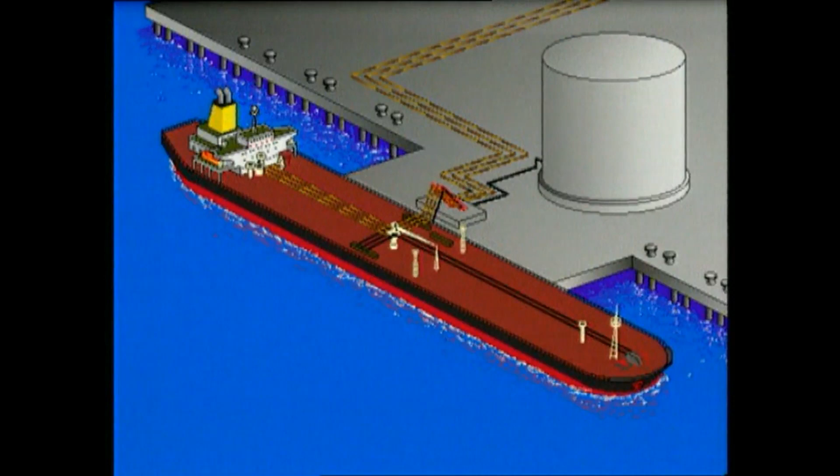The vessel has reached port and is ready to discharge her cargo of crude oil. To discharge the cargo, the vessel has 3 centrifugal cargo pumps. The pumps are located at the bottom of the pump room. The pump room is situated between the engine room and the cargo tanks. Let's take a closer look at the pump room and how to run the pumps.

We will not be looking at the order of cargo discharge, nor will we look at the operation of the crude oil washing system. However, both these are important aspects of cargo discharge.

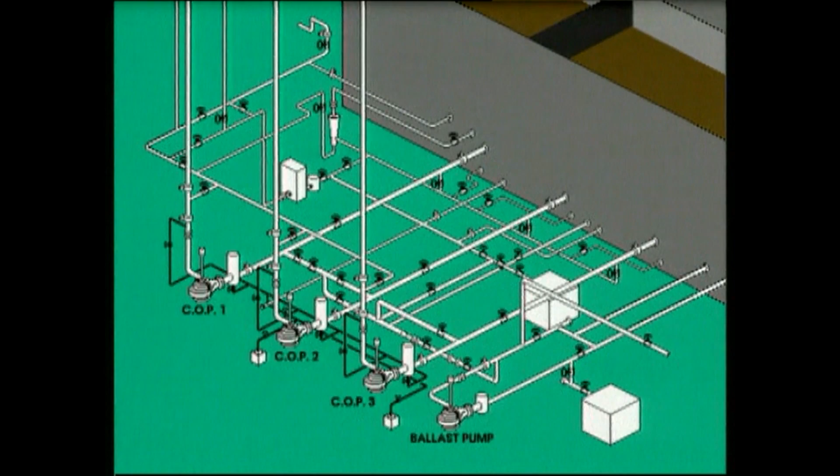Each cargo pump has a capacity of 4,000 cubic meters an hour. In front of the pump is a mud box with a strainer to protect the pump from solids. There is a riser to the deck line with a non-return valve and a discharge valve.

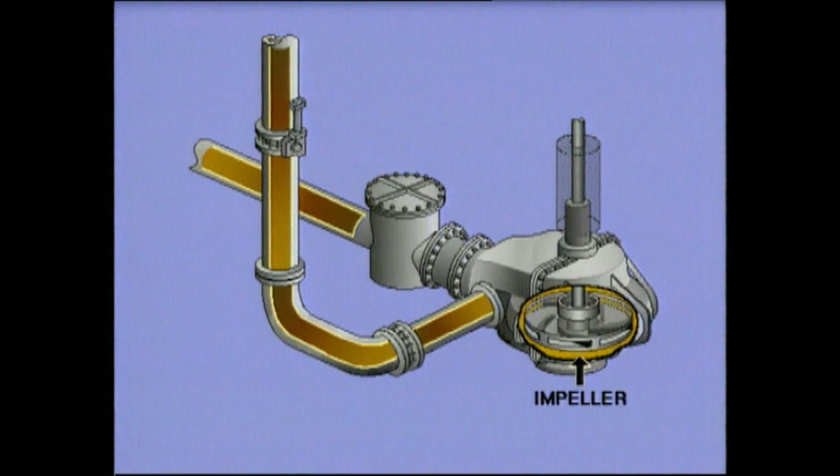In slow motion, this is what happens. When the pump is running, the so-called impeller is driven at high speed, showering liquid through the pump. The liquid is entering the rotating impeller through the eye in the middle. The impeller vanes force the liquid to the periphery of the pump. Velocity is converted to pressure in the casing of the pump.

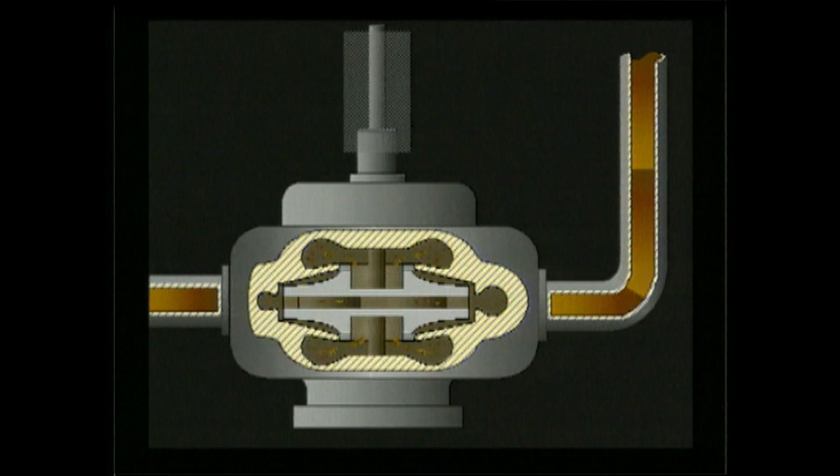Let's start with an empty shore tank, an empty line, and a ship's tank filled with 20 meters of fresh water. Let's imagine the pump as a closed valve. Note the different heights marked. In this example, fresh water is shown to simplify the calculations, and we'll be using the metric system.

There are manometers at the suction side and the pressure side of the pump. There is also a manometer where the vessel is connected to the shore at the ship's manifold.

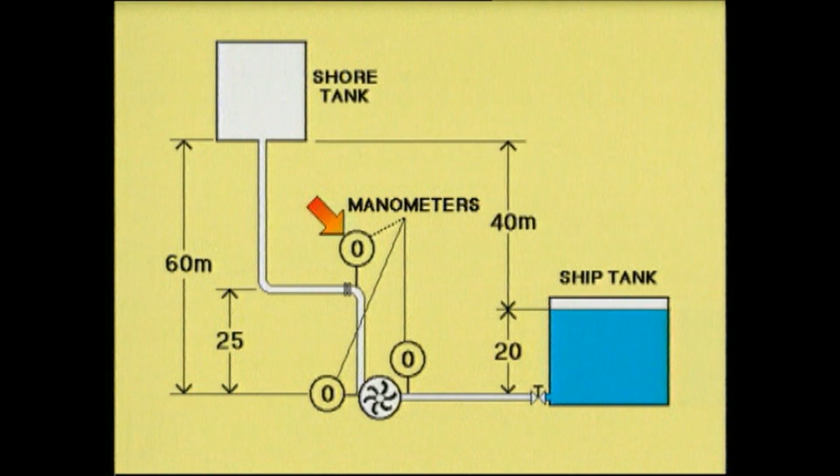We're now filling the lines with water. The manometer at the suction side reads 2 kilograms per square centimetre, at the pressure side 6 kilograms per square centimetre, and the manifold manometer 3.5 kilograms per square centimetre.

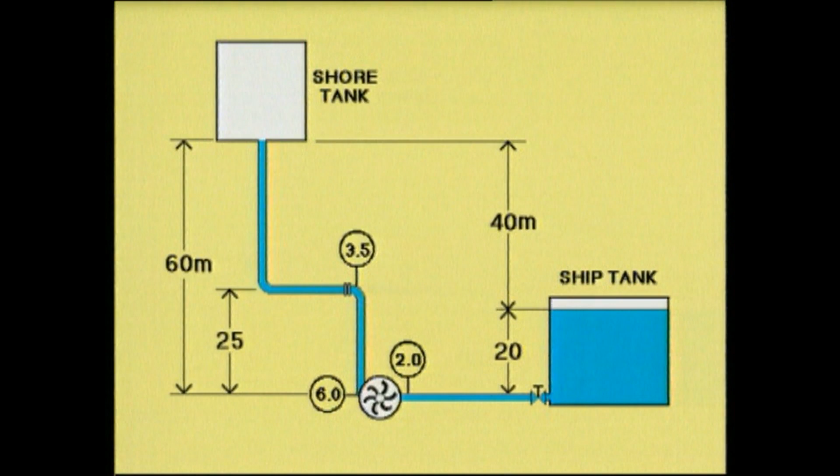The situation looks like this. There is one column of liquid, 20 meters high, standing on the suction side, called the suction head, and another column, 60 meters high, standing on the pressure side of the pump, called the discharge head. The difference, 40 meters, is the total head. To pump water to the shore tank, the pump must create a head bigger than 40 meters.

An additional 3 meters of water is filled into the shore tank. You should note that the pressure at the pressure side of the pump rises by 0.3 kilograms per square centimetre. The pressure has nothing to do with the volume of the pipe or the tank. Only the difference in height counts.

There is no change of the suction head. Total head is now 43 meters. This is the static situation.

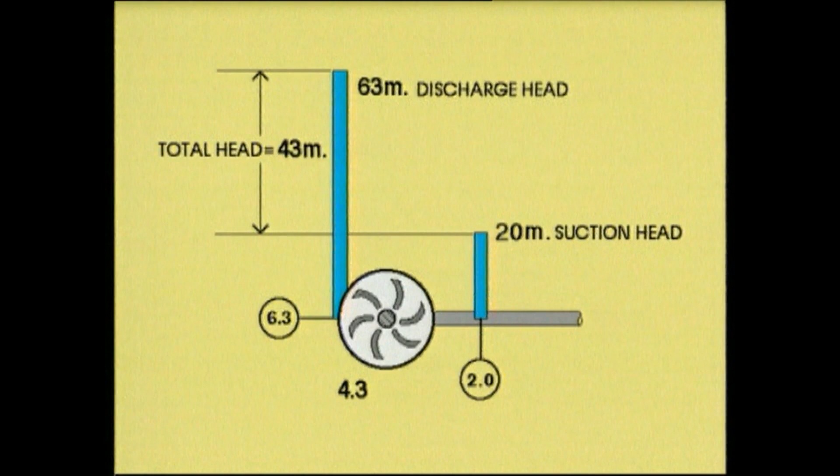Now let's run the pump. We will use this symbol for the energy added to the system by the pump. The smaller symbols show the resistance in pipes and valves. This is the dynamic situation.

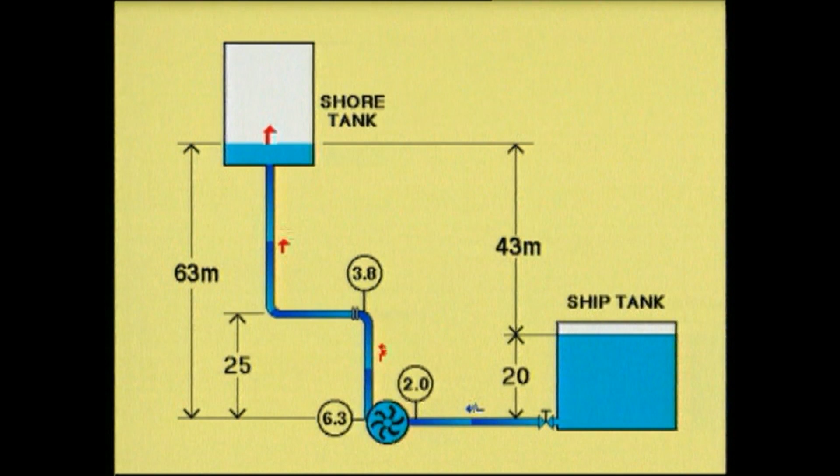Watch the changed readings of the manometers as the pump adds energy to make the water flow. Let's say 5.5 kilograms per square centimetre is added by the pump. In theory, the manometers on the pressure side should show 5.5 kilograms per square centimetre more. But in practice, they don't. This is because the resistance results in a pressure drop along the line.

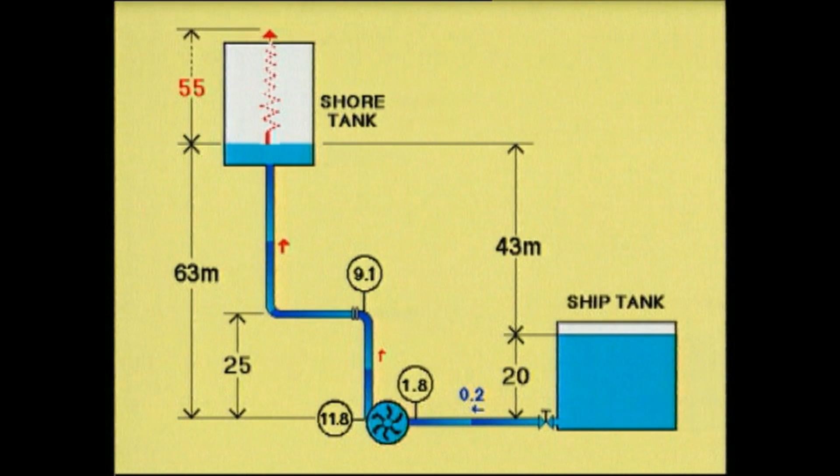Without resistance, the manometer at the manifold would read 3.8 plus 5.5, giving 9.3 kilograms per square centimetre. But the resistance eats 0.2. So the manometer reads 9.1. There is a pressure drop also on the suction side of the pump. So the manometer now reads less than 2 kilograms per square centimetre, 1.8 in this case.

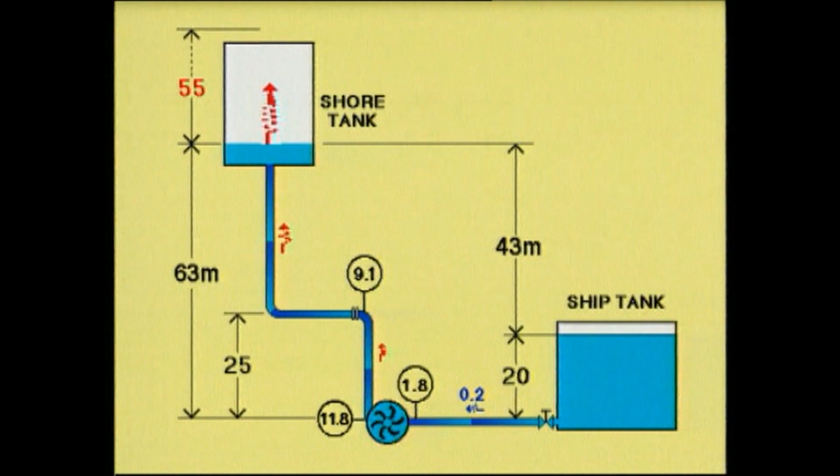Let's go back to the running pump. Now imagine a column of 18 meters of liquid standing on the suction side and a column of 118 meters standing on the pressure side. The difference between the two manometers, 10 kilograms per square centimetre, when converted into a column of water, is 100 meters, so the head is 100 meters.

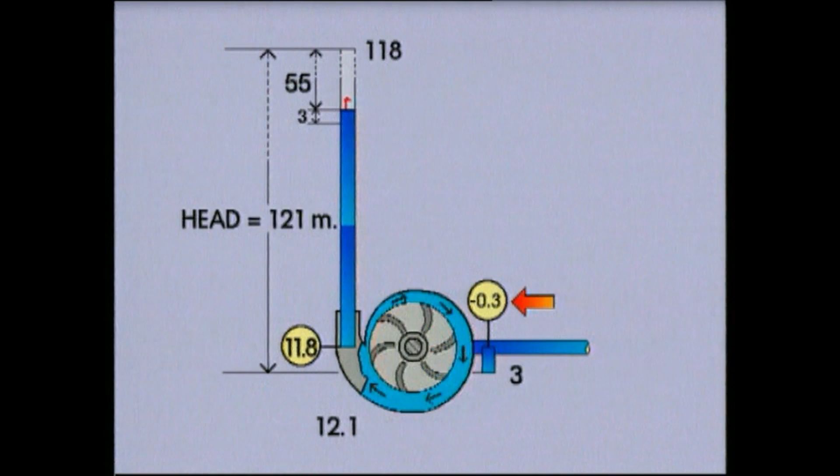Always calculate the head from the difference between the pressure side and the suction side. But remember, if the suction side manometer shows below 0, you have to add the two readings to get the head.

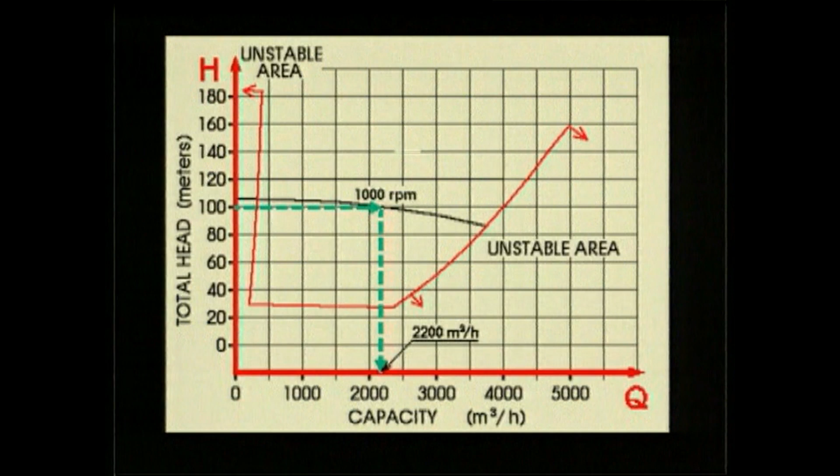If the head is 145 meters and the pump is operating at full speed, we're at its designed maximum capacity, giving 4,000 cubic meters per hour.

When you discharge to shore, the situation is not that clear. That is why it is so important to understand the readings of the different manometers.

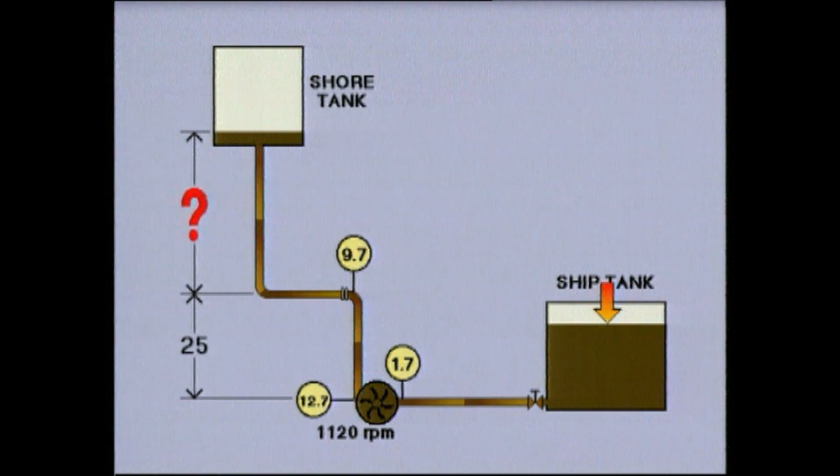By carefully watching what happens in your own vessel, you will be in control. You know the speed of the pumps, and you know the head. The HQ curves will give you the capacity at any given time. Of course, you should also take ullages every hour to check the discharge.

Now we're pumping oil instead of water, but the principle is the same. The specific gravity of the oil is approximately 0.9. Here, the difference between pressure and suction side is 11 kilograms per square centimetre. To find the column of liquid, divide by 0.9 and multiply by 10. So the head is 122 metres.

The HQ curves will tell you the quantity being pumped.

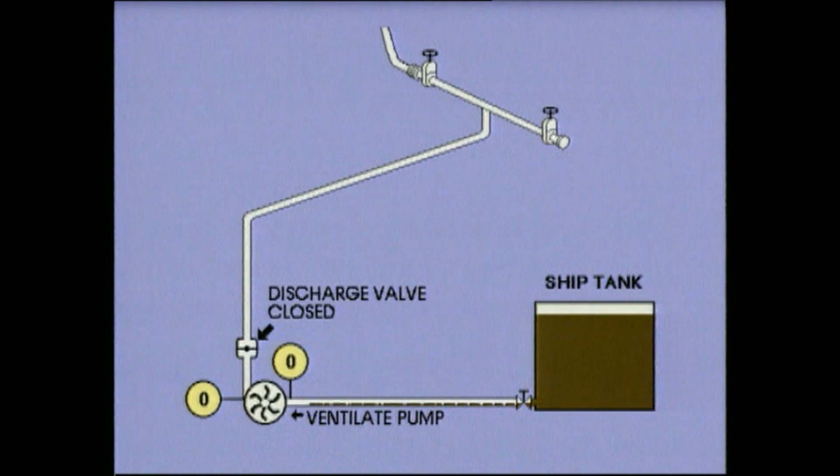Before you start a pump, it should be carefully filled with liquid and ventilated. Make sure that all valves between the tank and the pump are open.

Check the suction side manometer as well as the manometer on the pressure side. They should show approximately the same reading. This is the time to do a final check on the accuracy of your instruments.

Since you know the columns of oil in the tanks, you can calculate the pressures the manometers are likely to show.

Check that all valves at the pressure side are open except the discharge valve. To protect against pollution, don't forget to check frequently the integrity of the sea chest valves.

A centrifugal pump should always be started against a closed discharge valve. Never forget this. And don't run the pump for more than 30 seconds against a closed discharge valve.

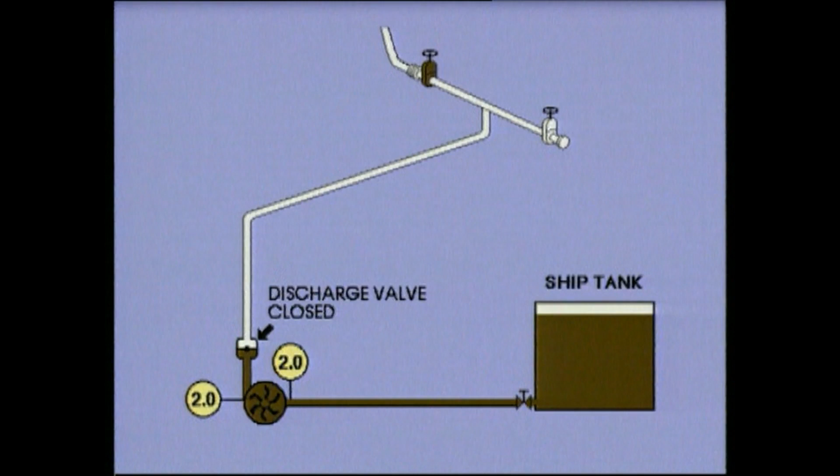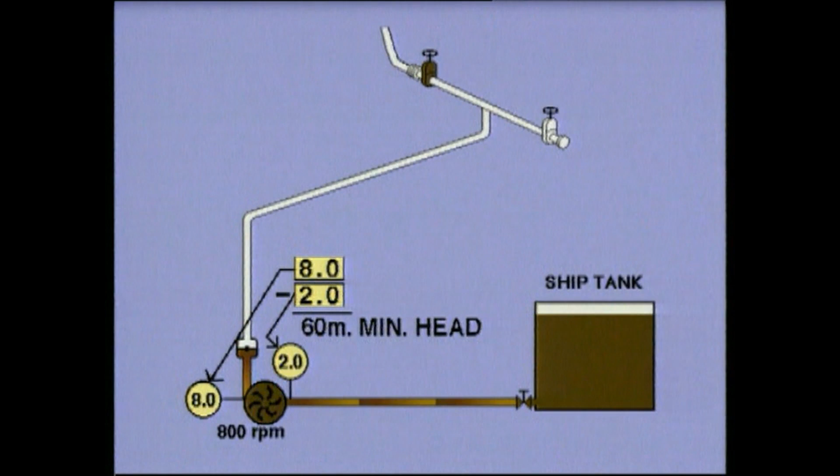Slowly increase the speed of the pump. Watch the manometers. When you have a difference that gives you a head of approximately 60 meters, crack open the discharge valve and speed up the pump a bit. Open the valve gradually and speed the pump in such a way that the pressure is rising, not dropping.

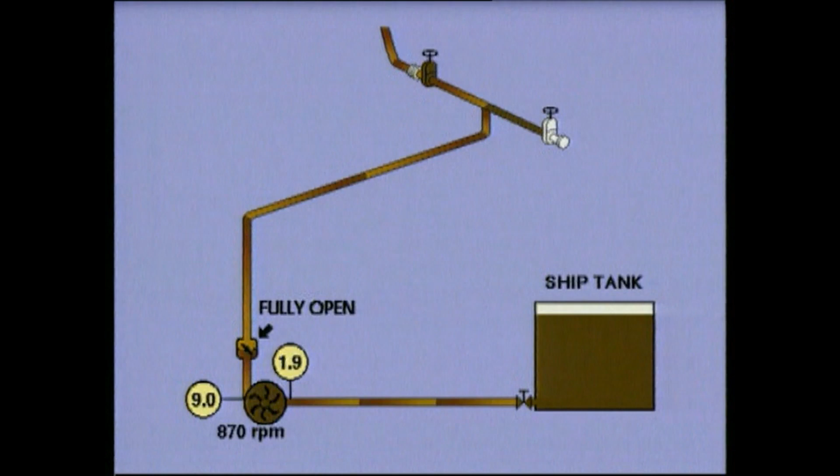Always run the pumps with fully open discharge valves. Try to reach full speed. However, in case of very low back pressure, you may be forced to throttle the flow with the discharge valves so the pumps don't run at overcapacity.

If the head is 145 meters, the pump is giving its maximum capacity, 4,000 cubic meters per hour. If the head is more, the pump gives less. If the head is less, the pump gives more. You should not run pumps over their nominal maximum capacity.

When you start the pumps, you should really be on your toes. Have people watch out for leaks in the pump room and on deck. Check the pumps for vibrations, leaks and abnormal sounds. If something should happen, or if you think something is going wrong, don't hesitate to reduce speed or stop the pumps.

If you speed up a pump and find you've forgotten to open the tank, stop the pump, then fill the pump with liquid. Then start the pump again. Just opening to the tank will most likely totally wreck a speeding pump.

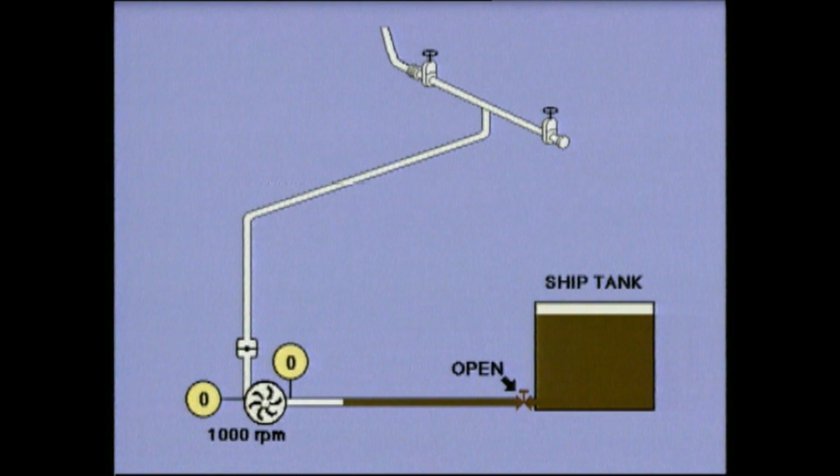The man at the manifold has reported a flow of cargo. By now the discharge valve is fully open. Now take the pump up to 900 revolutions. Then start the next cargo pump in the same manner.

The pressure at the manifold increases as the second pump is taken up to 900 revolutions. Start the third cargo pump in the same manner. You are phasing in the pumps to run in parallel.

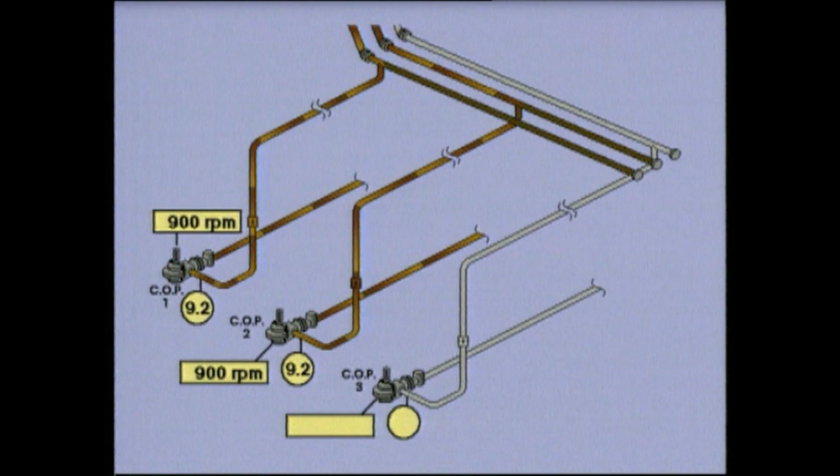Take your time doing this. It takes at least half an hour to bring the pumps up to maximum capacity. The pumps are gradually taken up, if possible, to reach their full speed of 1,250 revolutions.

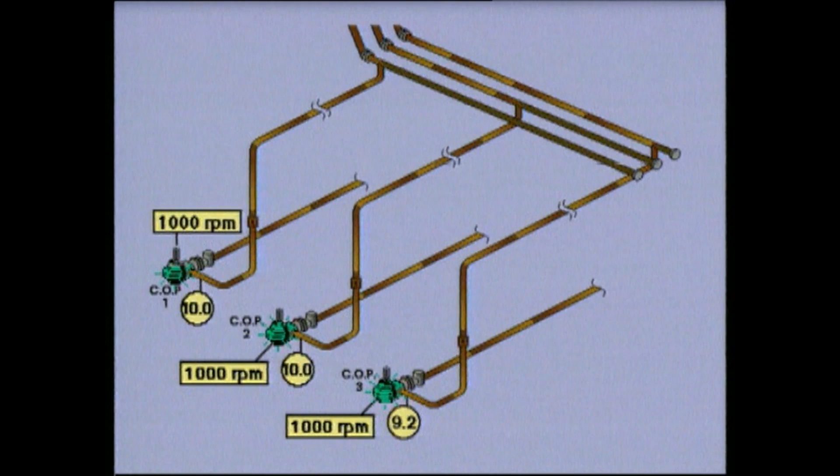Watch the head and increase the speed until the pumps reach maximum capacity, or until the manometer at the manifold shows the agreed maximum allowed pressure. In this case, you have a restriction given by the installation of 10.5 kilograms per square centimetre.

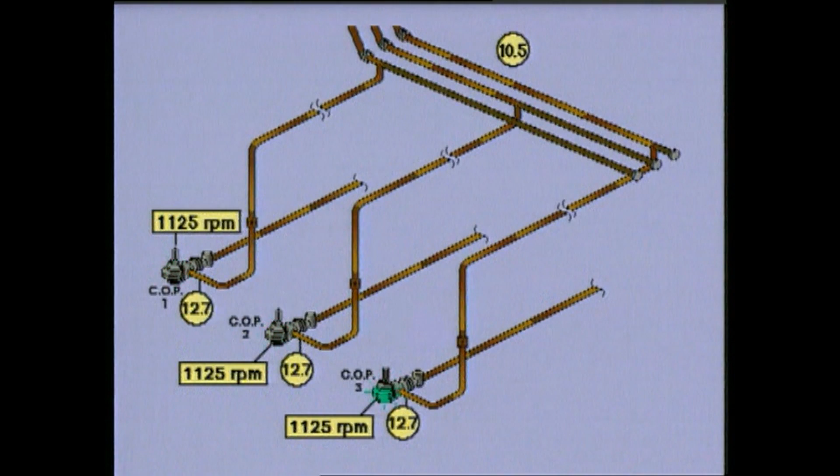All three pumps should run at approximately the same speed and at about the same pressures. With all three pumps running at 1,125 revolutions, the pressure at the manifold reaches the maximum allowed. The pressure side manometers read 12.7 kilograms per square centimetre, and the suction side manometers read 1.7. The difference is 11. So for crude oil with a specific gravity of approximately 0.9, the head is 122 metres.

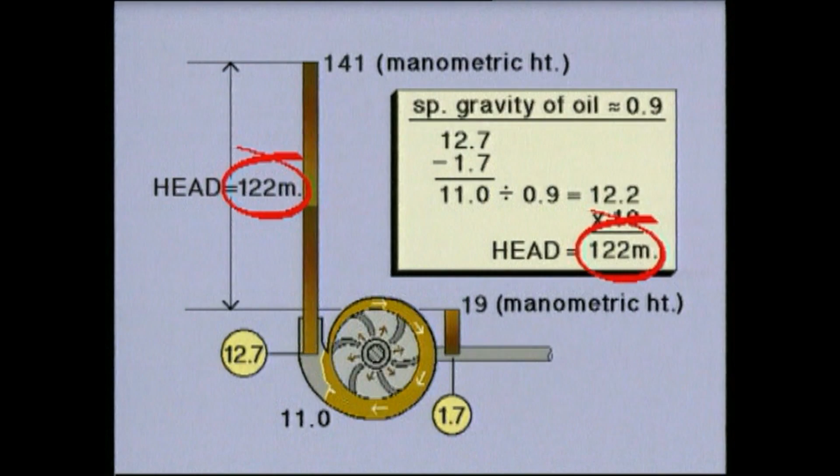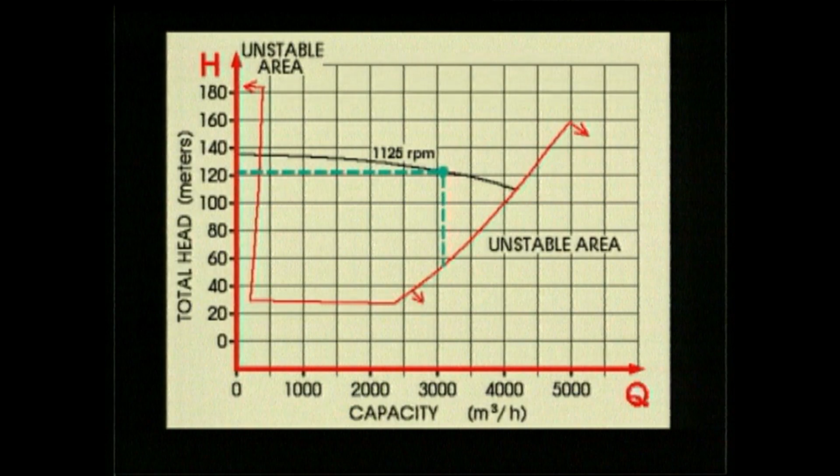Each pump is giving approximately 3,100 cubic metres per hour. All three pumps give approximately 9,300 cubic metres per hour. This is not full capacity, but you can't do anything about this, as you have to observe the maximum allowed pressure at the manifold.

When the pressure at the manifold drops, you can speed up the pumps. You should, of course, try to run the pumps at full speed if possible.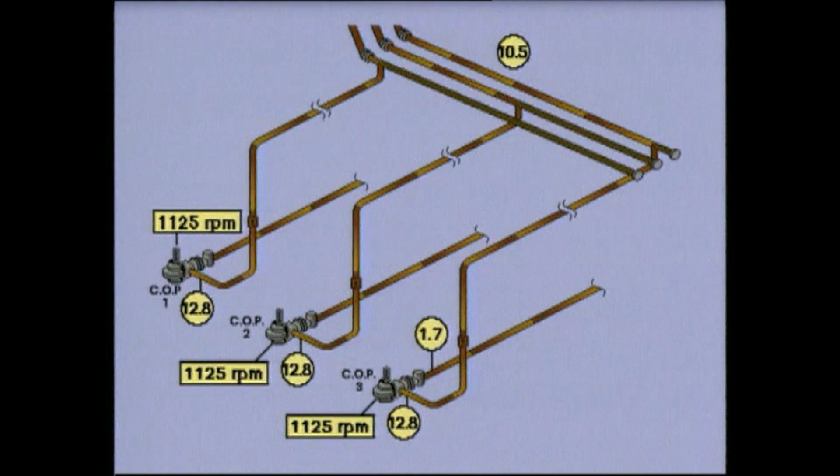If the installation shifts to other tanks, it may result in a different head, forcing you to adjust the speed of the pumps. Your discharge plan should be arranged to share the discharge evenly with the three pumps, to optimize their use. A pump having access to less cargo should be fed additional cargo from other tanks.

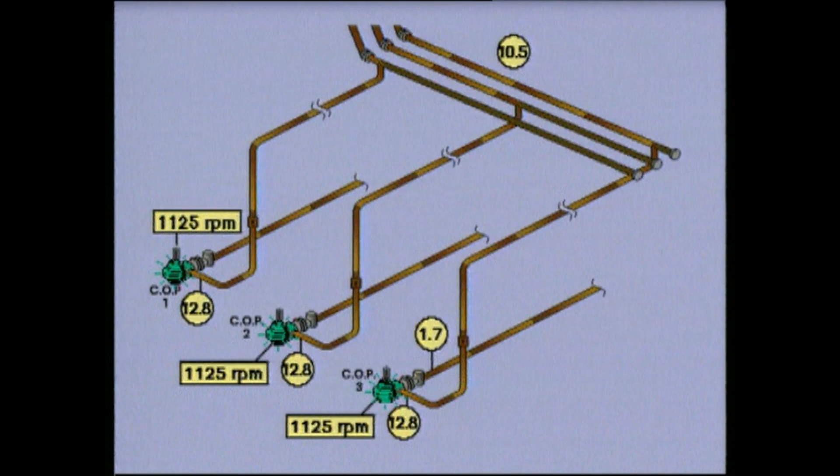All the pumps are now running at full speed and the manometers show approximately the same readings. You are pumping bulk. When pumping bulk, your job is to keep the pressure at the manifold as high as possible for as long as possible. Again, run your pumps with fully open discharge valves at highest possible speed.

As the levels in the tanks come down, you will encounter other problems. We will talk more about these in Pumping Cargo 2.